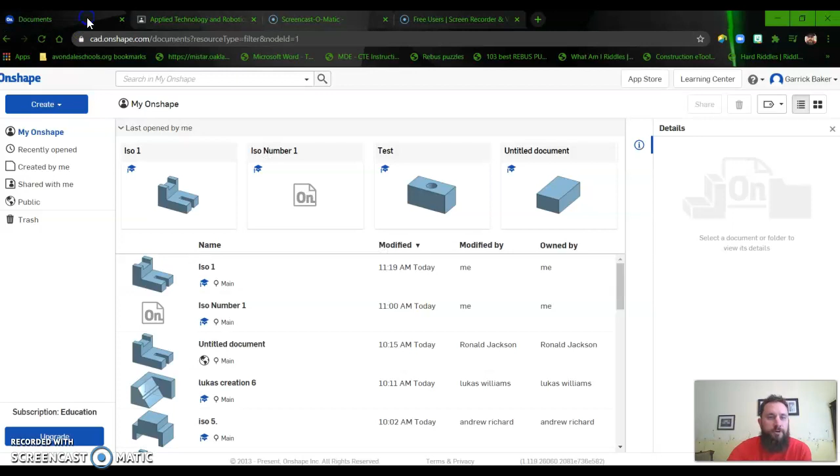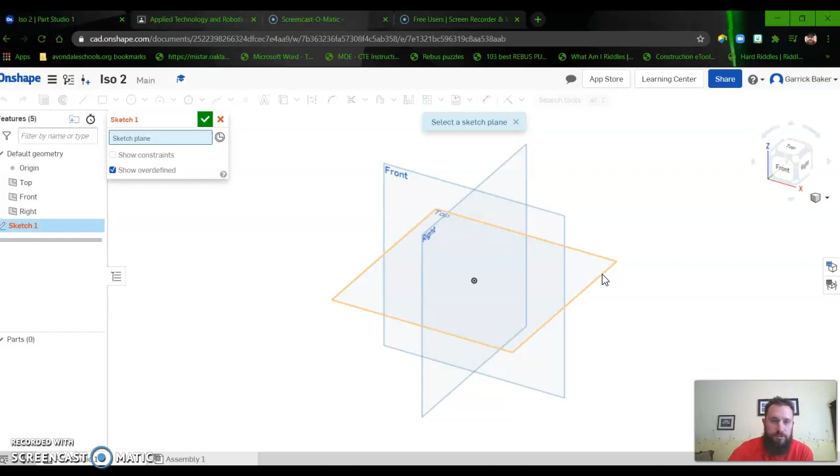All right, so I'm going to go back. I'm going to create a new file, do document. I'm going to call this one ISO 2. So again, I'm going to start with a sketch, and this time I'm actually going to sketch on the top here. I'm just going to sketch on this one here, and then I'm going to click on top.

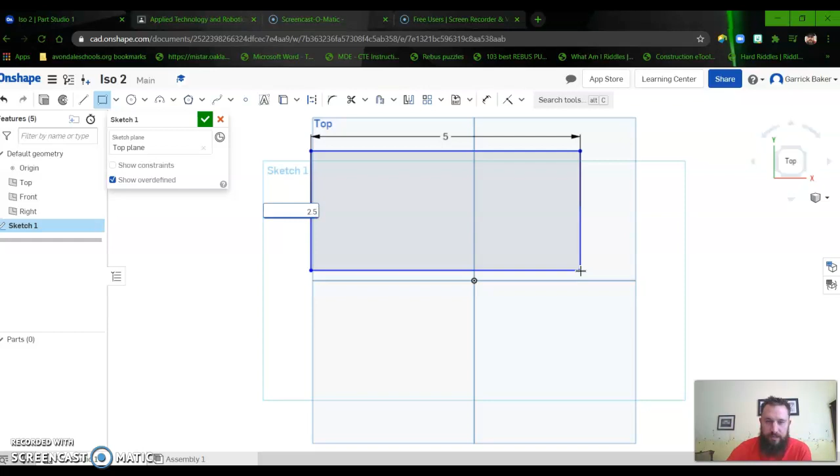All right, so like I said before, I'm going to start with the square. I'm going to do a corner rectangle. I'm going to create my rectangle, and again, the length of it is 5 inches. So if you type in 5 and then enter, and then 2.5 and then enter. So it's 5 by 2.5.

And then I'm going to extrude this, and I'm going to extrude it 1 inch. All right, I'm going to go back to my front view here. So this is the first start of this guy right here. So now what I'm going to do is I'm going to do these shapes here, the little thing standing up.

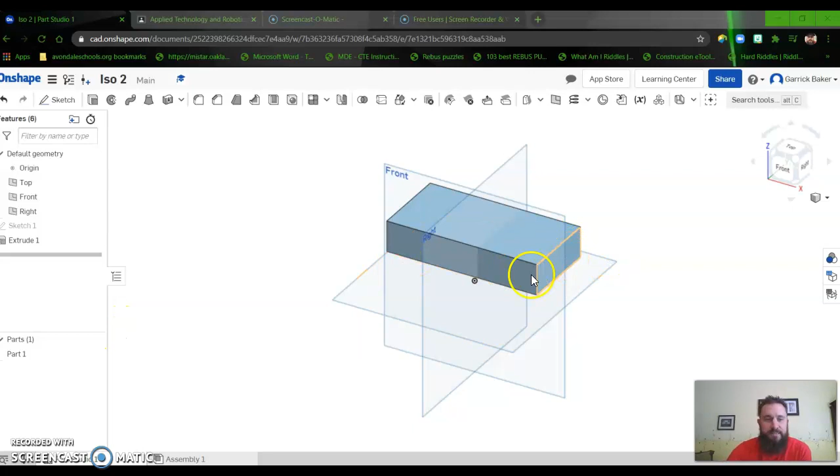All right, so I'm going to start with, all right, so I'm going to continue. I'm going to sketch on my right side this time because I'm going to add those two little pillar looking things at the top. So I'm going to create sketch, and I'm going to sketch on this face right here. I'm going to look at the right side.

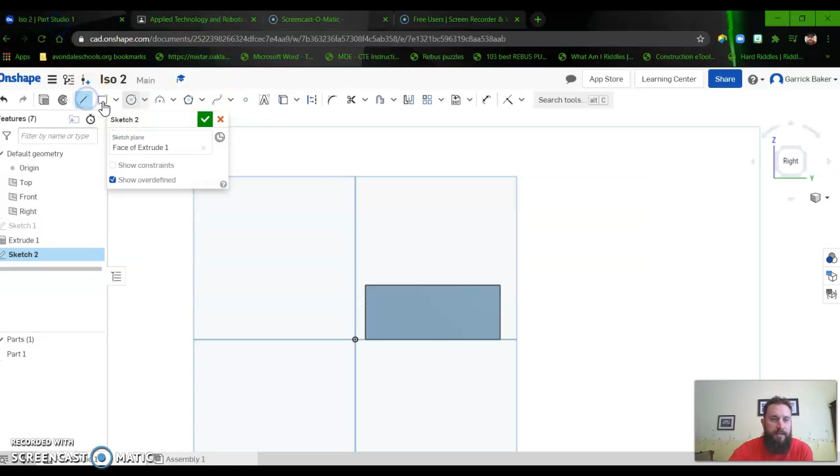All right, so I'm going to sketch from the side what this looks like right here. So just carefully follow along with what I'm going to do. I'm going to create a line. I'm going to start it at the top of the rectangle here. I'm going to go straight up. I'm going to click the line, and I'm going to make that measurement 2. Then I'm going to go to the left here. Click to set it. I'm going to make that measurement 0.5. Then I'm going to hit escape to close out my line tool.

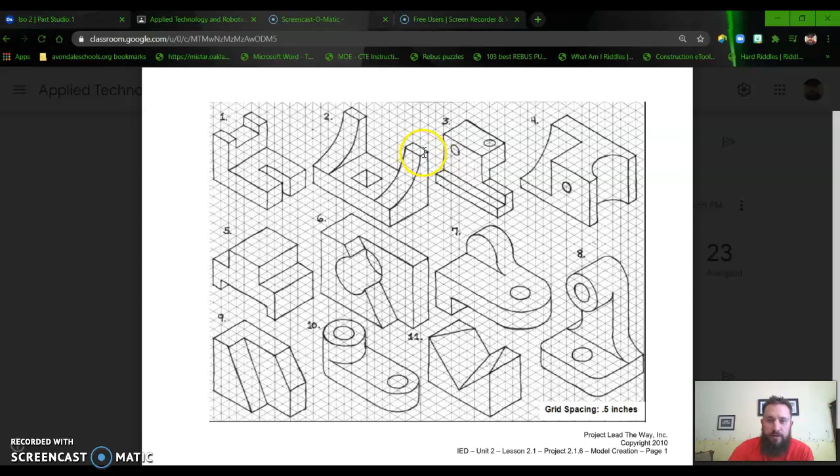So what I just did here is I made this line right here go all the way up 2 inches, and then this slot, this little spot right here is a 1/2 inch. So I just made this line from here to here.

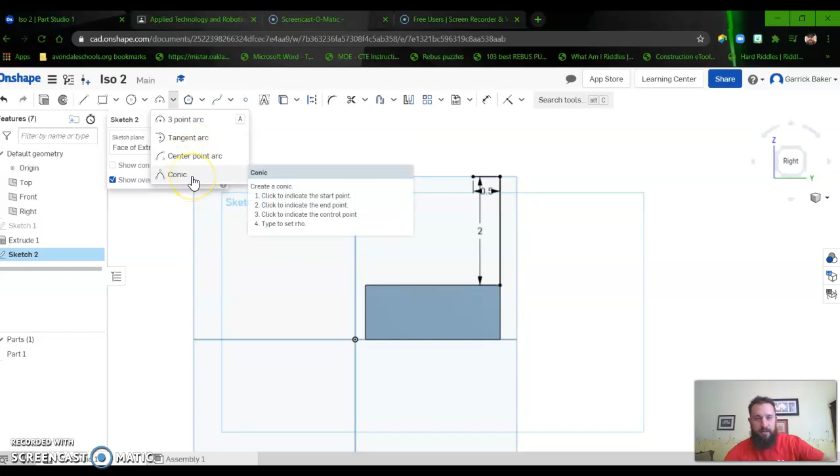And now what I'm going to do is I'm going to create that rounded part. It's kind of like a fillet, and I'm going to use the arc tool. So I'm going to click over here, and there's a couple of different arcs that you can do. There's 3-point arc, tangent arc, center point arc, and conic arc. I'm just going to do a 3-point arc. A 3-point arc is you want to click on your start point, your end point, and then you set your radius for this here.

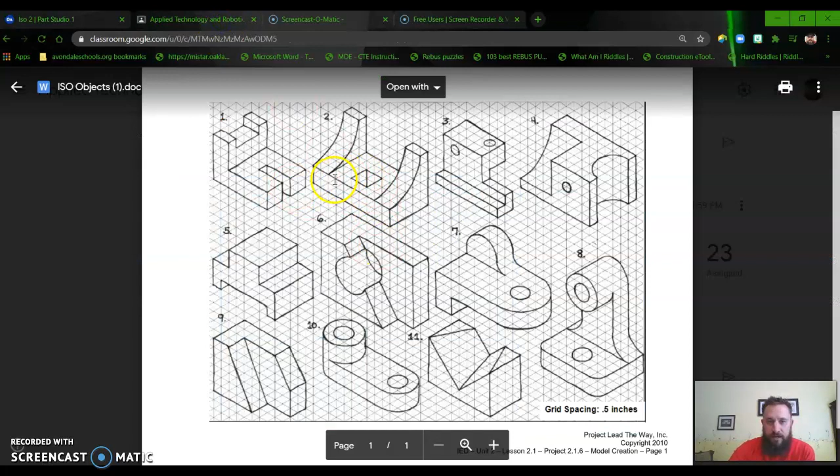So I'm just going to click somewhere right now, and it's going to ask for my radius. So if I'm looking back at it, I kind of count it in here. So it's 1, 2, 3, 4 to here, which is 2 inches, and that's what I'm going to consider as the radius. So the radius is 2, and that is the radius is half of a circle. So I'm going to type in 2 and hit enter.

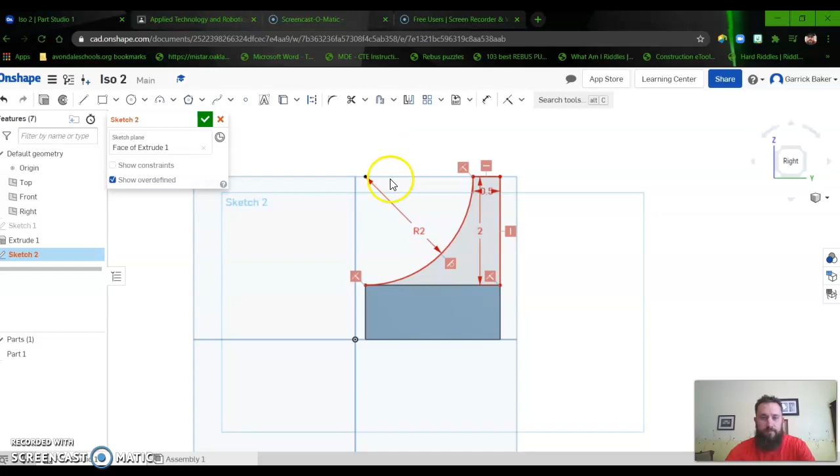Okay, so now that I have this set as 2, this is what this should look like. So I'm going to finish this sketch and hit extrude. Again, I'm going to go at an angle here so I can see it better.

I'm going to select this as my face. Now, if you notice, it's going in the opposite direction. This arrow right here says opposite direction, so you can click that and it goes on the other side. The depth of it is 1, that's how wide this should be, so I'm going to leave that set there.

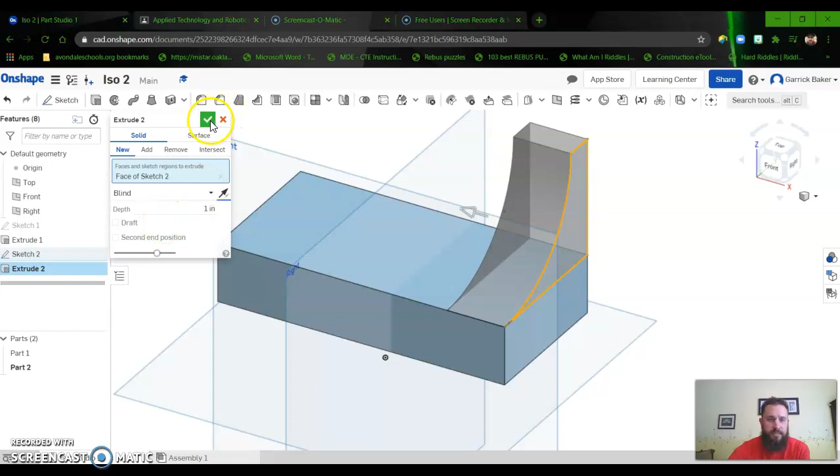All right, so I got 1 here. Now I just need to do it on the other side. There are 2 different ways you can go about making the one on the other side. One is you can create a sketch over there and do the same thing we did on this side, or you can do a mirror.

Now, in order to do a mirror, you need to create a plane, which these right here are considered planes, but we're going to create one. Up here in this tool, next to the coil looking thing, is called plane. So I'm going to select that, and I'm going to change my type of plane to mid plane. What I want to do is put a plane right in the middle of this rectangle. So I clicked on mid plane.

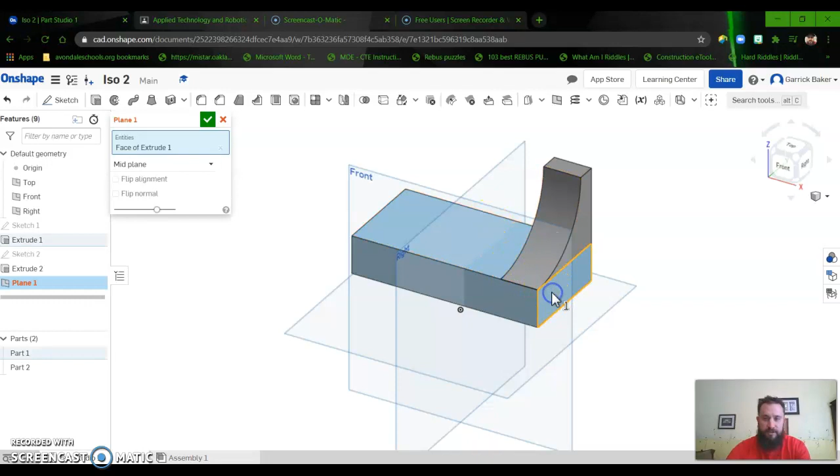Now I need to select my entities, which means selecting the points that I want my plane to be in the middle of. I'm going to click on this face right here, move over, and click on this face right here. Now, if you notice, plane 1 just popped in right here in the middle. If I look at my front view, I can see it's directly in the middle. That's what I want, so I'm going to click the green check.

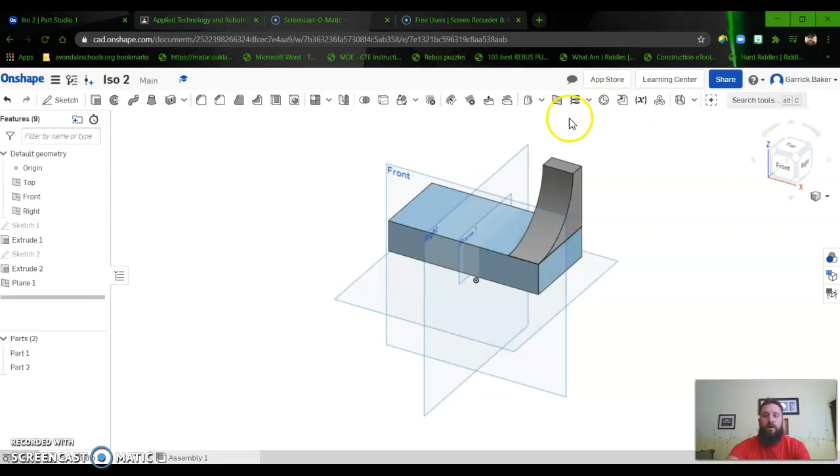So I made a plane now right here in the middle. The plane is just like an invisible wall. Now what I'm going to do to get this to the other side is use the mirror tool. So right here is mirror, and I'm going to click on mirror.

Now it wants me to select my entities to mirror, so I'm going to select this feature right here that we created. Now it's asking for a plane, so we're going to click on that plane that we just created.

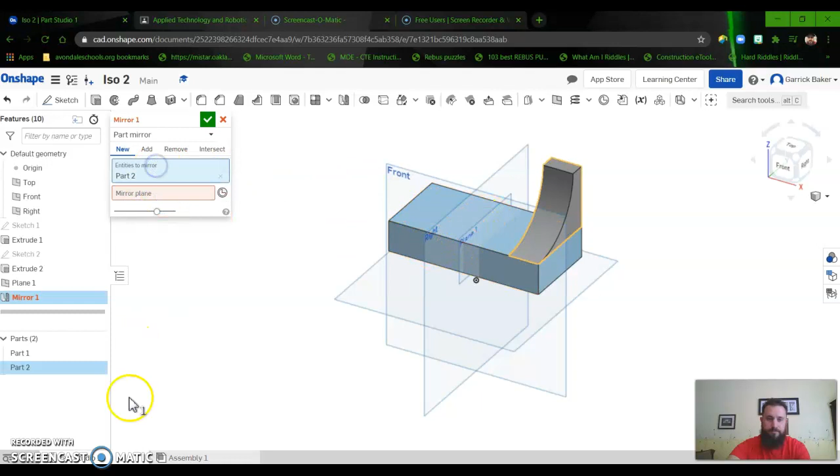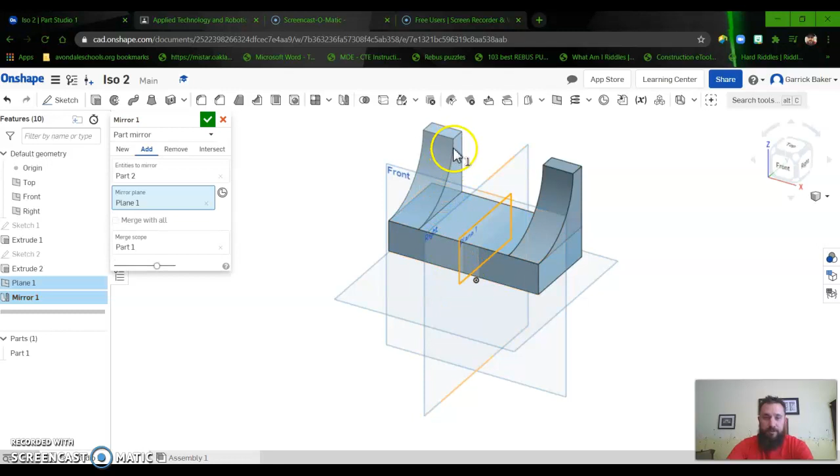So it's having a couple issues. My issue was I had it on new and I need to select add. So I'm going to click on the add part here. My entity to mirror is this guy here. I'm going to click on the mirror plane and then select my plane 1 that I just made. If you notice, it pops up over there on the other side. Then I'm going to hit my green check.

So now I have that on both sides. All that is left to do is the square right here in the middle, which is a 1 inch by 1 inch square directly in the middle. So I'm going to create a sketch on this face, look at it from the top, and do a 2-point rectangle.

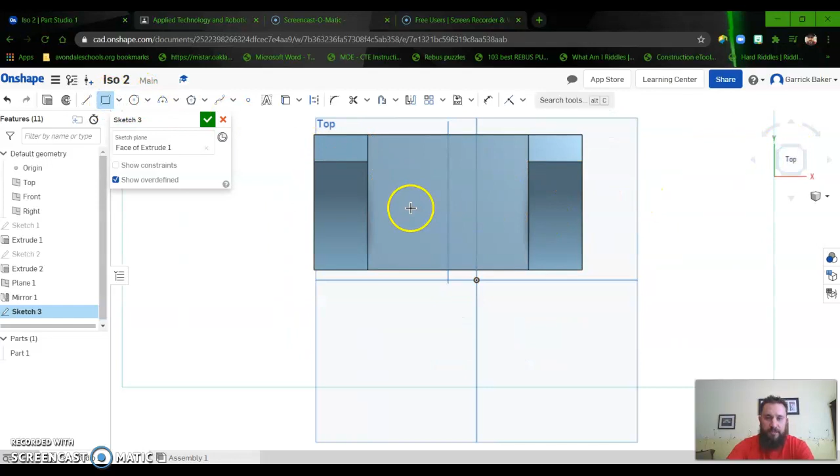And again, it is 1 by 1. I want to dimension from this line to this line - that should be 0.5. And then from this side to this side, and that should be 1.

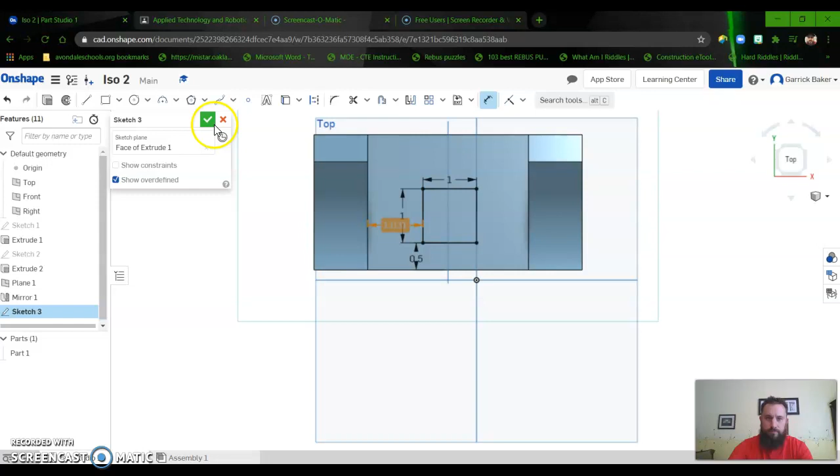All right, so now it should be right there in the middle, which in this case, it does not look like it. So I'm going to try to redimension that again and go back into my sketch. Dimension, I'll go from over here to here, I'm going to click on. There we go, so it's off just a little bit.

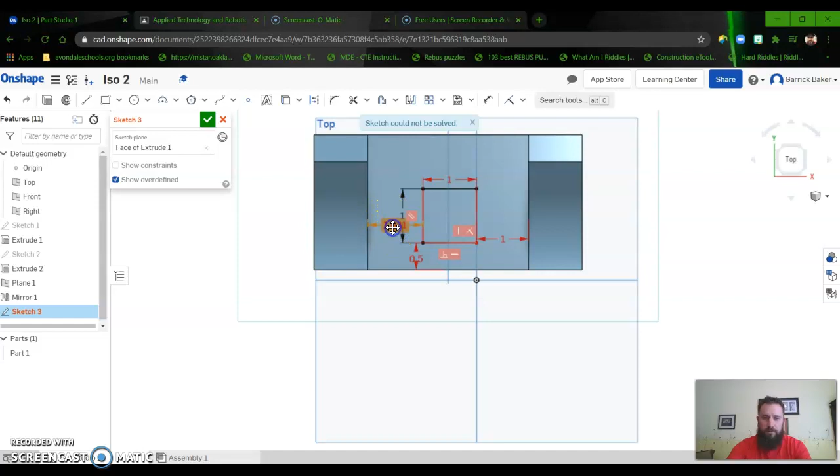There we go, so type in 1. I'm going to delete this dimension. There we go.

So I'm going to extrude that square right there. And again, I want to do a remove, and it goes to the part. Click check, and there it is. That is part number 2.